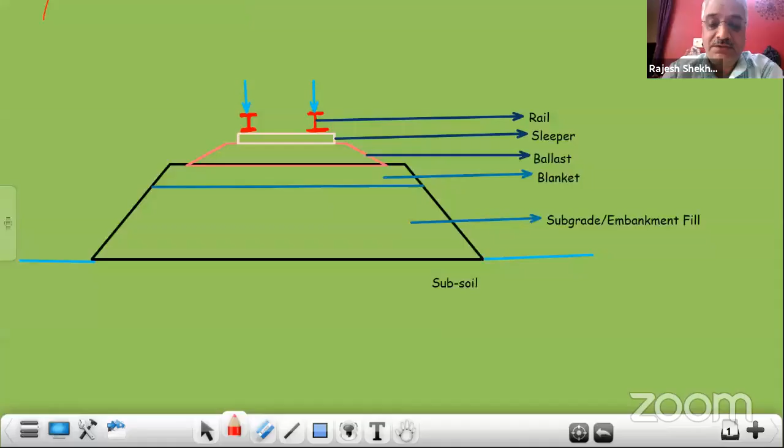Thank you, sir. First of all, I would like to thank Dr. Ramarao and his team for having given me this opportunity to interact with all of you on the subject of design and construction of railway formations. I'll be basically sharing with you the philosophy we follow and the essence of the standards we follow in Indian Railways for design as well as construction aspects of formations.

So, brief about this: Research Design and Standards Organization, what we call RDSO, is headquartered at Lucknow, and I was privileged to work there as Director Geotechnical Engineering. It is the key technical organization for Indian Railways research and standardization related matters. They publish various standards, codes, guidelines, and manuals, including our current standards and specifications for design as well as construction of the formation.

I can tell you they are at par with the standards followed in advanced railway systems. Regarding state of the art, we are at par with whatever railway system of the world we can talk about. And the current specification, which is being used generally for most places, caters to heavy haul.

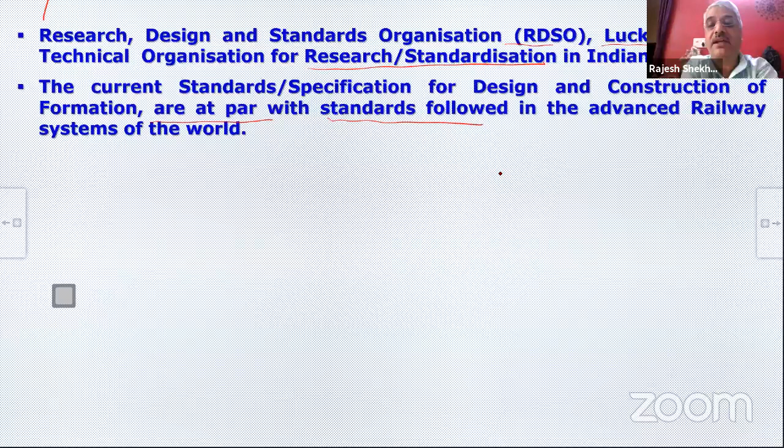Normally in railways, the haulage is spoken in terms of axle loads. So we have specifications up to 32.5 ton axle load. Most commonly used now are 25 ton and 32.5 ton axle loads. For normal railway works, all embankments are being constructed for 25 ton axle load.

And you must be hearing there are dedicated freight corridors. Two dedicated freight corridors are under construction: between Bombay to Delhi near Dadri, and on east to west from Dankuni near Calcutta to Ludhiana on this side. There, the axle load being followed is 32.5 ton.

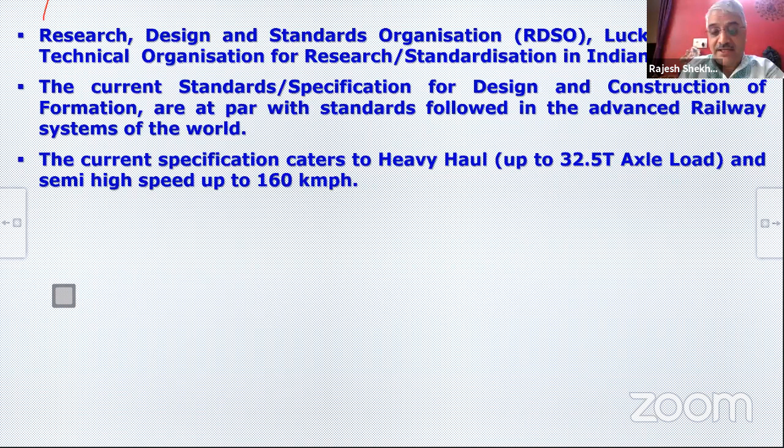Presently we cater up to 160 kmph speed because our passenger trains' maximum speed is 160. There was a proposal, and in fact the progress work is in progress, for what we call the bullet train or high speed between Ahmedabad and Mumbai, where the design speed is 320 kmph. For this also the specifications were under finalization.

But later on, government as a policy matter decided that this track will not be on conventional formation because of various issues related with acquisition of land and maintaining track without fencing and all those things. So now it is being constructed on viaducts, and therefore these specifications were not finalized. But whenever it is needed, they will get finalized.

Now to tell you about current standards, just a basic idea about how they were finalized and what they were based on: they are mostly based on standards and practices of UIC. UIC is a French name, its English translation is International Union of Railways. This is the world body of railways research and standardization, so our specifications are primarily based on the concept followed in UIC.

There are two or three concepts world over which are followed for embankment design. Most popular is UIC, which most European railways and most heavy haul and high-speed railways follow world over. There is another concept known as AREMA, American Railway Engineering and Maintenance-of-Way Association, which is a bit different from this. We basically follow the UIC concept.

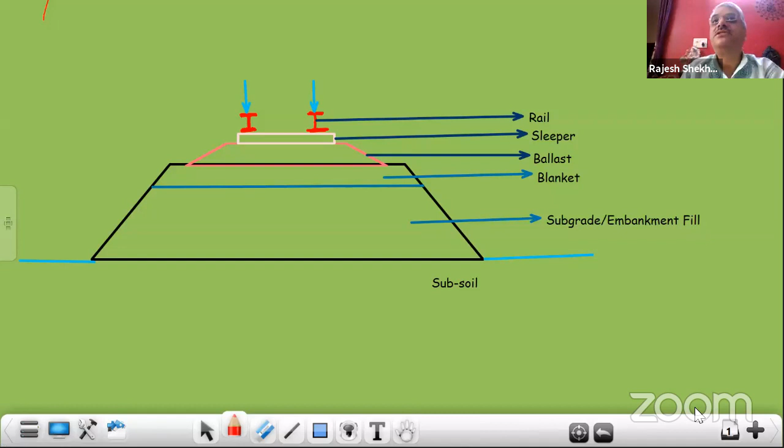For doing this, basically what is done in the UIC concept is something like this - I will just like to sketch it. If we see the cross section of railway formation, the load through axles or wheels comes to the rails. From rail it goes to sleeper. From sleeper, below it, there is ballast, so it gets distributed to ballast.

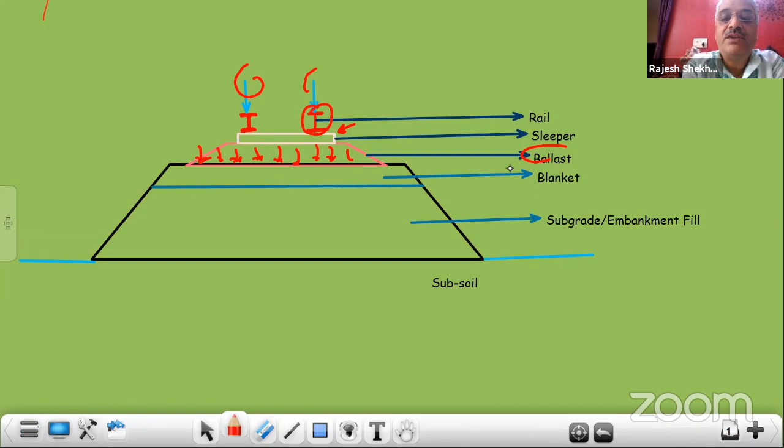And from ballast, as a uniformly distributed load, this goes to the top portion of the formation known as blanket - we'll see this in detail. From blanket it goes further to further layers. So normally the approach generally followed is that pressure intensity here should be less than or equal to 3 kg per centimeter square, and here it should be less than or equal to 1 kg per centimeter square.

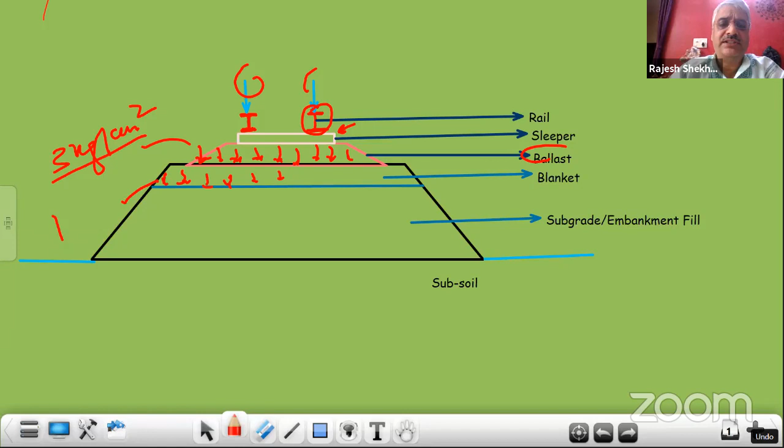This is talking about repetitive dynamic load. This is the general concept which UIC follows - this is the basic concept. That's why I said we are following the concept of UIC.

Then for achieving this in the Indian Railway standard, because we cannot ask users to do this analysis - every user at field cannot do finite element analysis or modeling - some ready-made parameters, based on this analysis, have been specified for direct implementation in the field, as we will go along. For doing this, FEM modeling and studies were done, wherein IIT Kanpur and IIT Delhi were involved.

All the components of track and embankment were modeled, and some field studies were also done. In addition, we have also gelled in more than 150 years of experience of Indian Railways in construction, maintenance, and strengthening of formations. Based on these three things, our specifications have been finalized, and in fact it is a continuous process.

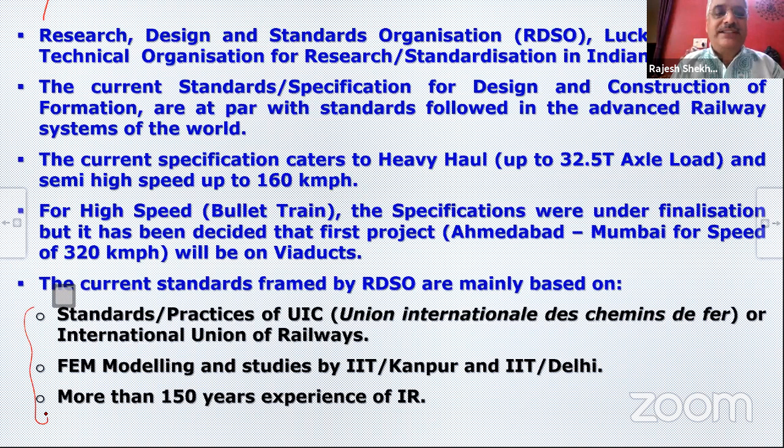Even last year and this year, we have issued some corrections, some additions, and RDSO keeps on doing it. There are people in the field also involved - there are committees. In fact, I am also a member of the committee which looks after revision of codes, which did the recent revisions. So this is in a nutshell how we finalize our specifications.

Now we will go further.

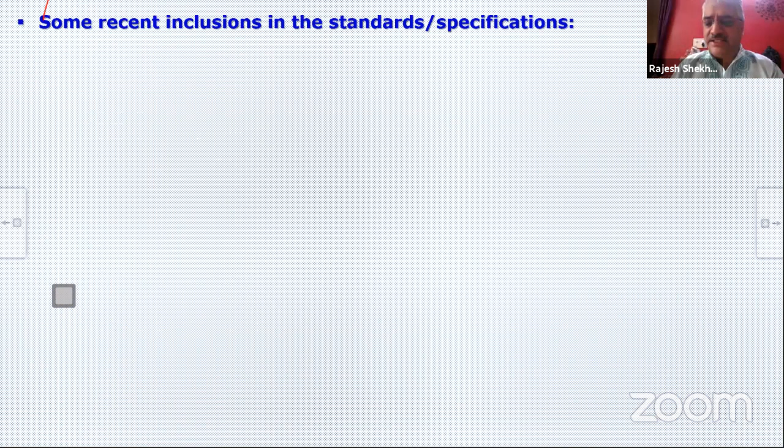Some recent inclusions in the standard or specification, or some concepts which we have introduced recently - I can say in the last 2-3 years. I will just briefly tell you before going into detail.

World over, for design of flexible pavement, railway embankment is also nothing but a flexible pavement. The concept of EV2 is the state-of-art parameter. EV2 is a deformation or strain modulus of the embankment. V means it is variable load. So under cyclic plate load test, when you measure the strain modulus, and 2 is for the second cycle - that is the strain modulus which you measure is EV2. We have introduced EV2 as an acceptance parameter for the finished layer in earthwork. We will see later what are the values and all. This is a very, very recent addition - last year, July only we did it.

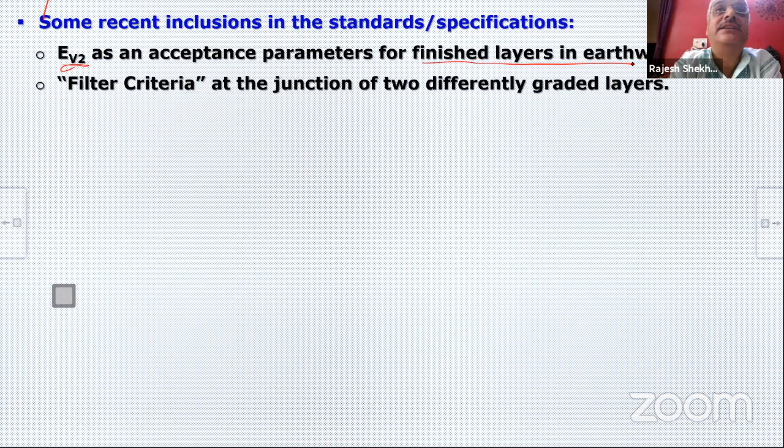We'll see this. Even in India, in highways and airport authority, people have been using nuclear gauges for checking quality of compaction, but there was no Indian code or method. Now, in fact, we have published our railway test procedure for using nuclear gauges for checking quality of compaction. It is mostly based on ASTM and British code, but based on our Indian conditions, we have tempered a few things, and this also has been issued.

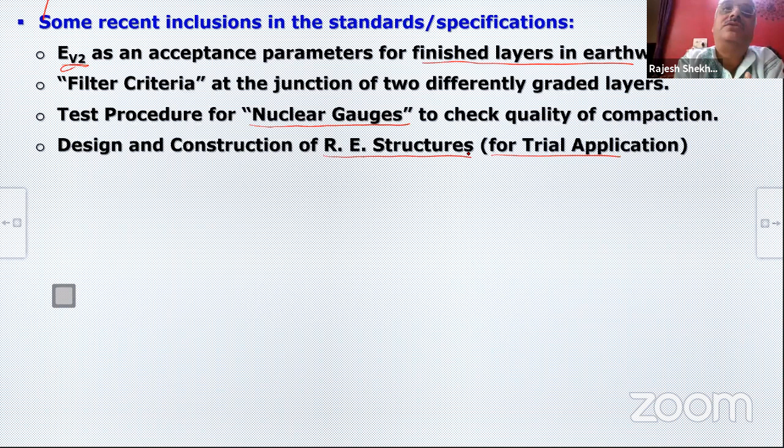Then we have also issued, for trial application, design and guidelines for design and construction of RE structures for railway embankment. We have been doing a lot of reinforced structures for highways like ROBs, which even railway does. For our railway structures, there was no guideline. So 3-4 years back, we issued it. Of course, it is for trial application and it is under revision now.

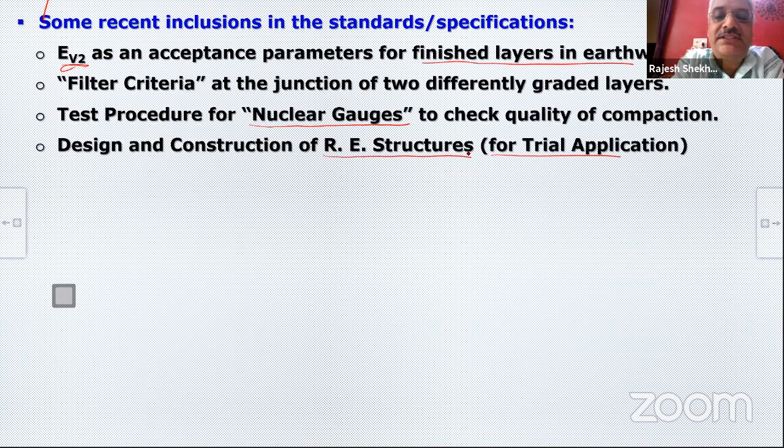We have a lot of jute geotextile products, especially in the eastern part - National Jute Board and an agency, IJIRA, Indian Jute Industries Research Association, doing a lot of work. In consultation with them, we have published our own railway standard for using jute geotextile in railway embankments wherever possible.

So this is just a brief background, and use of slope compactors. In fact, in our new specification which we are issuing, we are specifically making it mandatory to use slope compactors in addition to normal compaction of the embankment, because I have seen embankments in other countries - in advanced countries, in this country, everything is at state of art. The only problem where we were a little bit lacking was erosion control on the slope.

Many times the term sub-ballast is also used for blanket. But technically speaking, both are not the same, because sub-ballast is always part of ballast and extends only up to here. If it is sub-ballast, its cross section will be like this, and from here my embankment will start. Whereas blanket is part of formation, and therefore it extends to the full width of formation. So technically, blanket and sub-ballast are not the same, but as I told you, many places they are used interchangeably.

So this is blanket. Below blanket, the man-made filled-up layer is known as subgrade. We will be using this term, and many times we also call it embankment fill, subgrade or embankment fill. And many times subgrade is also divided into two layers, upper part of subgrade and lower part of subgrade.

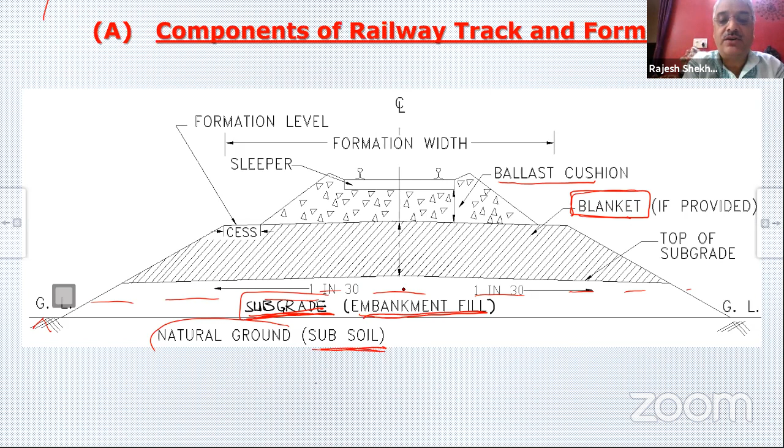We'll see it. And the existing ground, this is existing ground level. The natural ground below that is called subsoil. So the terminologies which we will be using very frequently in coming slides are blanket, subgrade or embankment fill, and subsoil.

Okay, so now what are the design and construction aspects in embankment? With the same sketch which I have just explained to you, I will show on that. First part is top width of the formation. What is shown here, from here to here, this is top width of the formation.

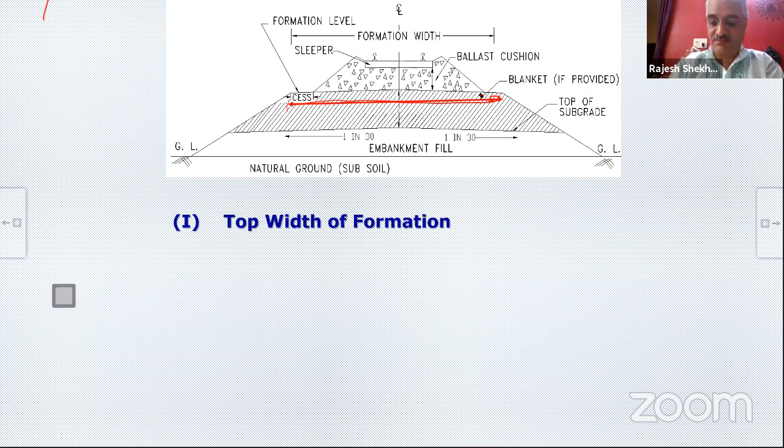First design parameter. Second is height of bank or embankment above ground level. So we are talking about this. This is ground level, this is top of bank. So this is height of embankment above ground level.

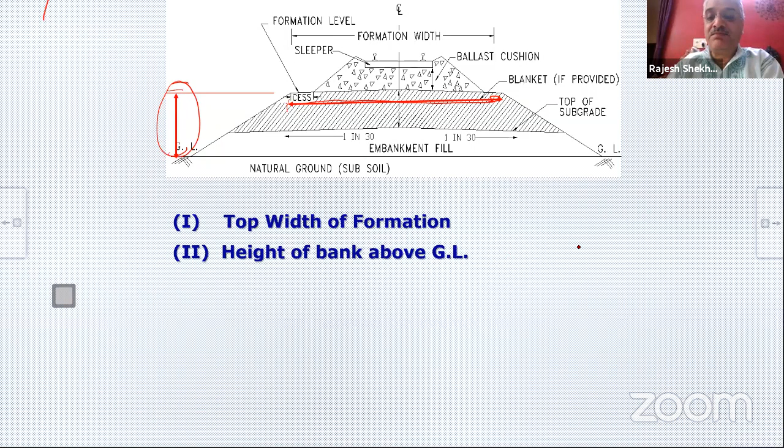Then next is side slope of embankment. So this is side slope of embankment. We are talking about this one. And it is, rather than in degrees, normally the practice is to express in terms of 1 vertical to how many horizontal - 1 vertical to 2 horizontal, 1 vertical to 3 horizontal, 4 horizontal. So 1 vertical to n horizontal, that is how we express it.

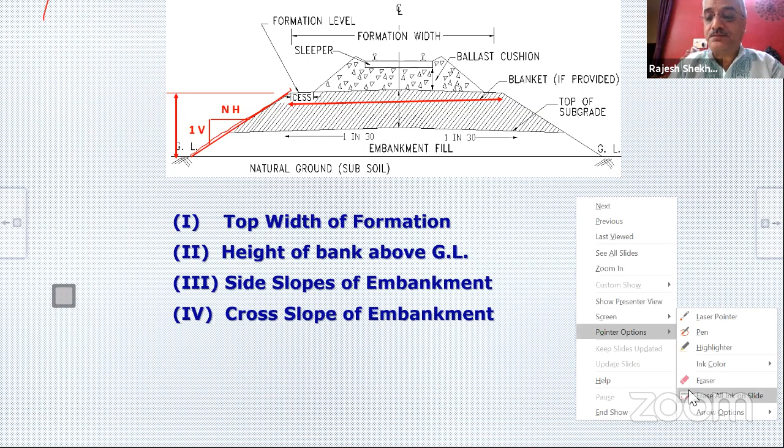Then the next design aspect is cross slope of the embankment. The top of the embankment is not flat. It falls from the middle, on both sides. So this slope is known as cross slope. When we are talking about cross slope, we are talking about this slope of the embankment, and this is also expressed as one vertical to how many horizontal.

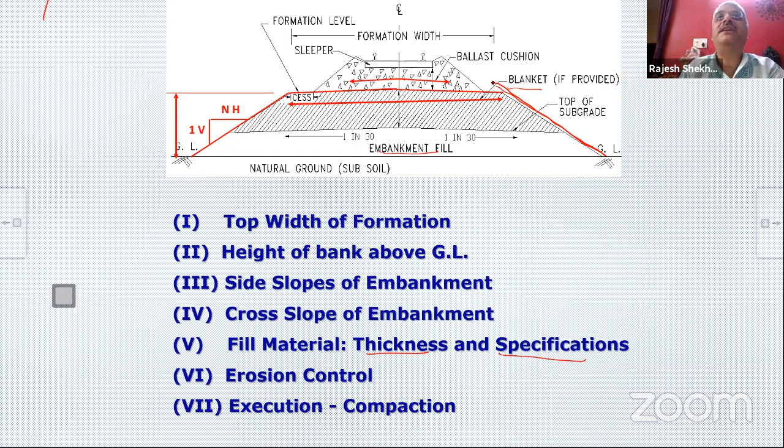Next part is fill material. There are two types of fill material, blanket and embankment fill or subgrade. So what are their thicknesses and what should be their specification? That is the next aspect. Then what sort of erosion control measures - and erosion control, when we are talking, it is about erosion control on slopes. And last is actual execution of work, laying the earth in layers, compaction, thicknesses. So these are 7 aspects of design as well as construction of the embankment.

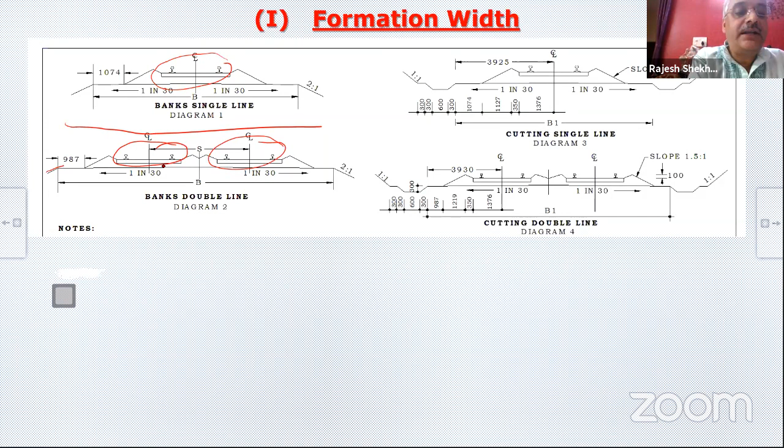This is one thing where it is embankment and it is single line. You can see there is only one track and it is in embankment. Second can be there are two lines, in embankment. So this is double line in embankment.

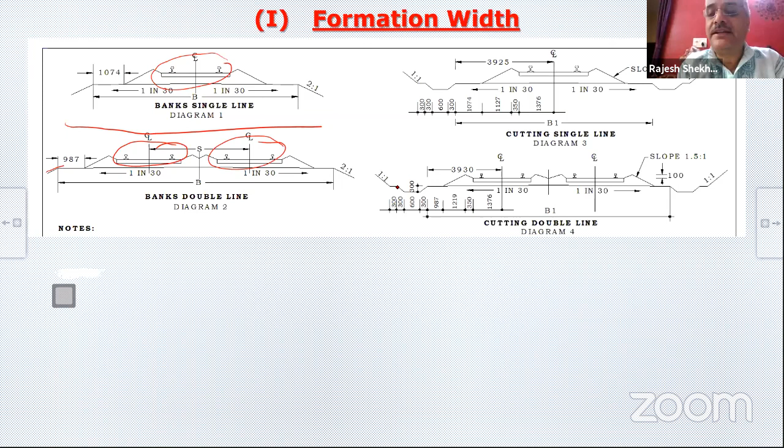Third can be single track, but in cutting. And fourth combination is double track in cutting. So these four are the most common combinations. For other combinations, of course, we can extend the same thing.

So for these combinations, the widths are specified like this. Of course, we are talking about broad gauge. I'm not talking about meter gauge because there are no more new constructions. So previously the width used to be different, but recently we have made them same for embankment as well as cutting. That is from the year 2015.

For single line in embankment or cutting, the width required is 7.85 meters. This is taking into consideration the width of sleeper from its strength point of view, required ballast cushion, ballast side slope, then some space on the side, what we call a cess, for maintenance to walk and work and all. With all those considerations, for single line this width is 7.85 meters, and for double line it is 13.16 meters.

And it is same now in embankment as well as in cutting. In embankment, of course, we measure it from this end of embankment to this end of embankment, whereas in the cutting we measure up to here only. And after this, there are some side drains in cuttings and berms and all, etc. So that's the only difference in measurement. Otherwise, as far as the width of formation is concerned, it is the same.

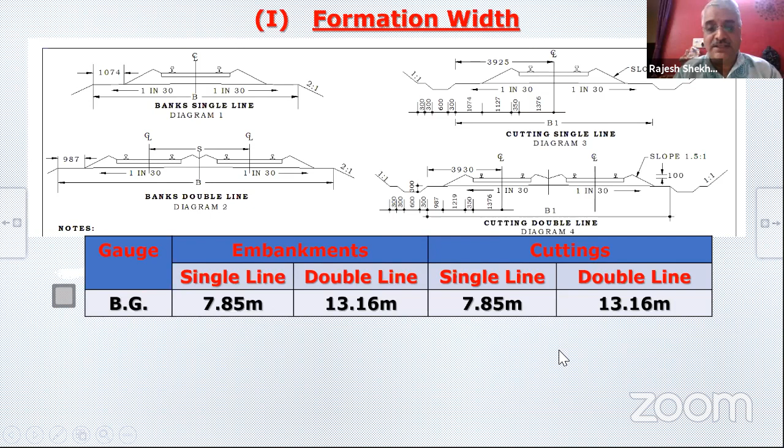First part done. Second part was height of embankment, and the stipulation is the height of embankment should not be less than 1 meter above ground level or HFL, whichever is higher. The reason for giving this is it gives proper drainage, because if embankment is just at the ground level, any water stagnant in the ground will have tendency to come and stagnate on track and create problems.

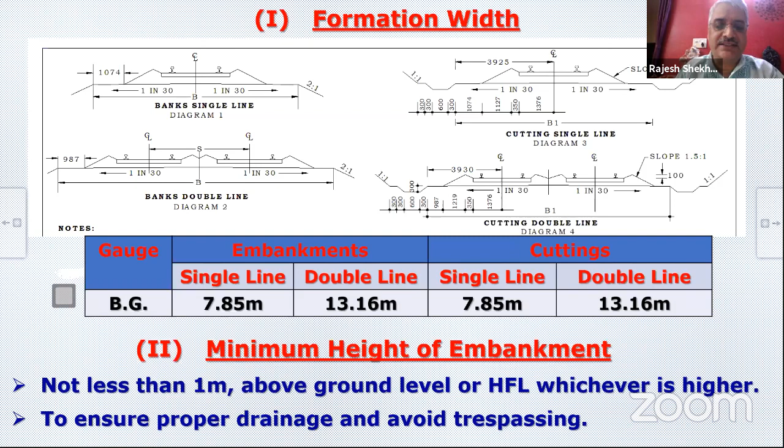So just to have drainage, that is the first thing. And the second thing, it discourages trespassing. It may not prevent trespassing, but in heavily city or town areas, people normally, if bank height is there, are discouraged from trespassing it. So that's the second reason. This is the second parameter about minimum height of embankment.

Then coming to side slope of embankment. Now the side slope of embankment is decided based on slope stability analysis. A slope stability analysis is done giving the properties of all the layers, subsoil, including subgrade, subsoil, subgrade, and blanket, their properties, their geotechnical engineering properties, and slope is analyzed.

And the method prescribed is Bishop's simplified method. We use this right now because this method, number one, gives results on the conservative side, and it can be easily done even manually, not so easy, but still as compared to other methods. And in Bishop's method also, for taking into account the pore water pressure effect, the use of coefficient RU, the pore pressure coefficient, has been defined.

RU, as we know, is pore pressure divided by weight of soil at that place, U by gamma H. This is the RU value. So this method is prescribed. And for existing bank, if you are analyzing stability, we can measure pore water pressure using any instrument and calculate RU. For new bank, actual measurement is not possible.

So there are two solutions. Number one, we do the modeling, hydraulic modeling, like many software now. SlopeW has got interface with SeepW. From SeepW, you get this value RU. Or, design RU values are prescribed, and we can use directly those design values from our codes.

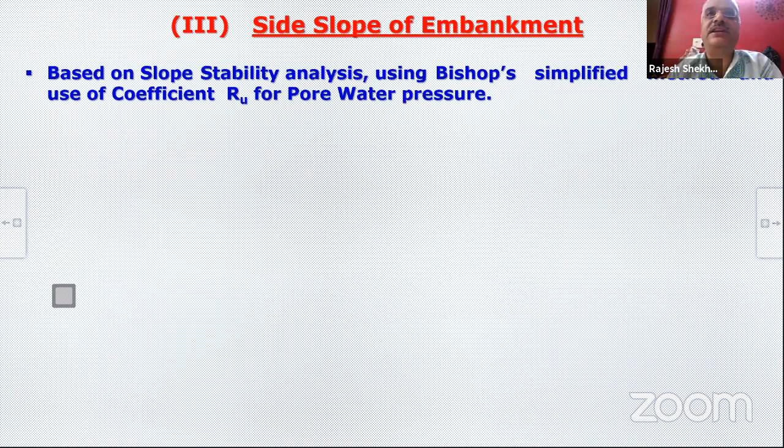And our code says that normally or usually up to a height of 6 meters, slope stability analysis is not required. You just follow the standard slope.

Oh, again, there is a, am I audible? Because again there was a power fluctuation. I think power has come back now. Hello?

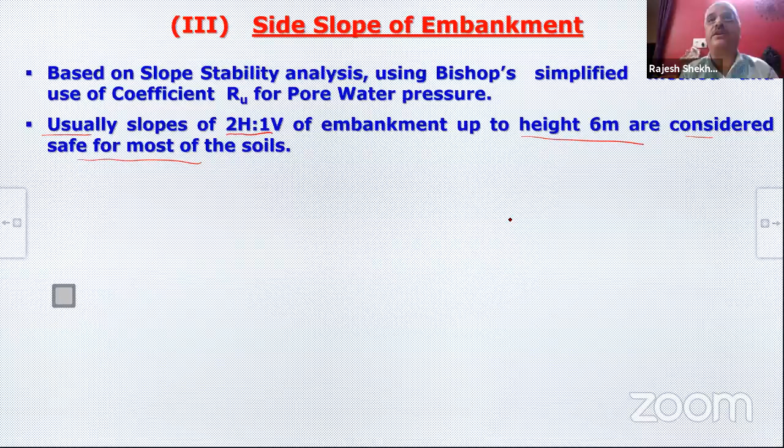In some cases, we may have to do slope stability analysis for less than 6 meters also. Those cases are where it is soft, compressible, or marshy type of subsoil, like coastal areas and river delta areas, what we call marine clay or soft soil. In those areas, because even smaller banks, we have experience in coastal areas. I have worked for a long time there. Even banks of 3 meter and 4 meter heights have failed, so even with slopes flatter than 2 horizontal to 1 vertical.

So there we must do slope stability analysis for any height of bank. And second thing is, even if the subsoil is weak, and even if subgrade is fill material having a low value of C dash, where low value is defined by C dash by gamma H in the range of 0.01 — C dash being effective cohesion value, gamma its in situ density, and H the height of embankment — in these two cases, we do slope stability analysis for smaller height slopes also.

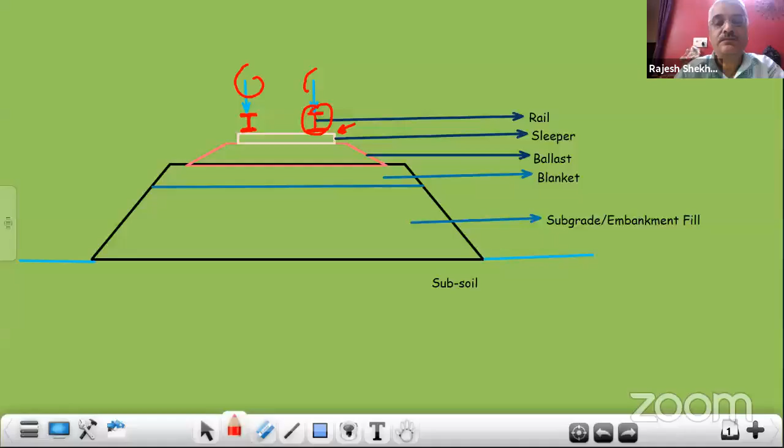And in our slope stability analysis, we don't take live load into consideration. The reason is that this live load effect dies down within the top 1 to 1.5 meter of formation. In fact, we have checked this by modeling and physically by putting pressure cells and all. The live load effect does not go below the top 1 to 1.5 meter of the formation. And if you want to take live load into consideration, the analysis becomes complicated and difficult, so we don't.

That is the reason. But this becomes an issue in case of smaller height embankments, because if my embankment height is less — say 3 meters — then 1.5 meters of that height is influenced by live load, and that becomes significant. So how we take that into account, I will show next.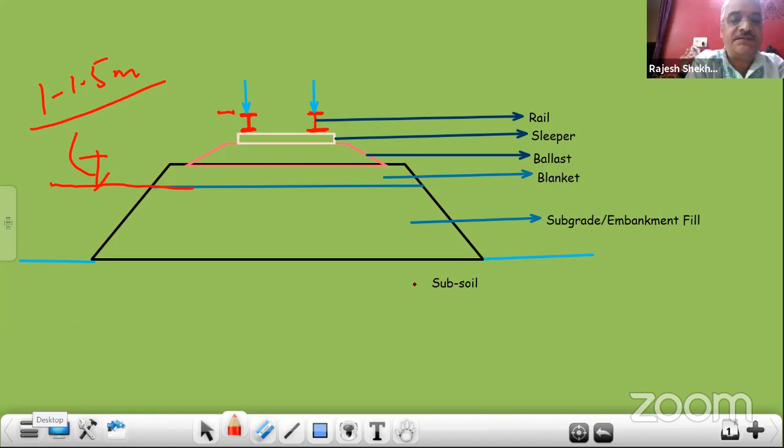The minimum stipulated values of factor of safety after doing slope stability analysis by the Bishop simplified method are: for short-term, end of construction use, before putting anything else there, we can go up to 1.2. Otherwise, preferably for long-term stability it is 1.4. And for smaller height embankments, as I was telling you, the effect of live load is indirectly accounted for by prescribing a higher factor of safety of 1.6.

So for embankments of height up to 4 meters, the prescribed factor of safety has been kept as 1.6, because we are not taking into account the live load effect, and for these embankments live load cannot be neglected.

That's the logic. After doing all this analysis, either you provide the slope as per analysis found to be safe, or at minimum it should be 2 horizontal to 1 vertical. In normal cases, other than reinforced slopes, normal slopes should not be steeper than 2 horizontal to 1 vertical. The reason, number one, is that our Indian railway system is still semi-mechanized.

There are human beings who work and climb on the embankment with weight on their shoulders, so climbing on a steeper slope becomes difficult. Second, in case of rain, the velocity of rainwater becomes high and causes more erosion to the bank. Based on these two considerations, this limit is set, but there are steeper slopes possible, where we have to take special measures, or make reinforced slopes or protected slopes.

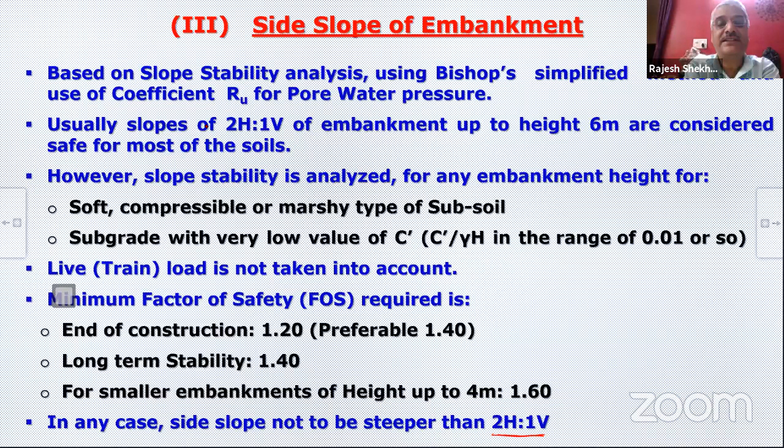Then coming to the fourth part, that is cross slope. In case of single line, it starts from the center of the track — this is for a new single line when we are constructing — and it falls on both sides. In case of double line, it starts from the center of the bank and then falls on both sides, with a value of 1 in 30.

This is the design value of cross slope, and it is given for drainage, because you don't want your formation to remain in contact with water for a long time. Drainage is the best maintenance practice in railway embankments, or for that matter any embankment. So we want to drain the water away from the formation as early as possible, and this is the first line of defense against that. 1 in 30 is the cross slope, and plus minus 2 is the tolerance provided, so after execution, when we measure, it should come within the value 1 in 28 to 1 in 32.

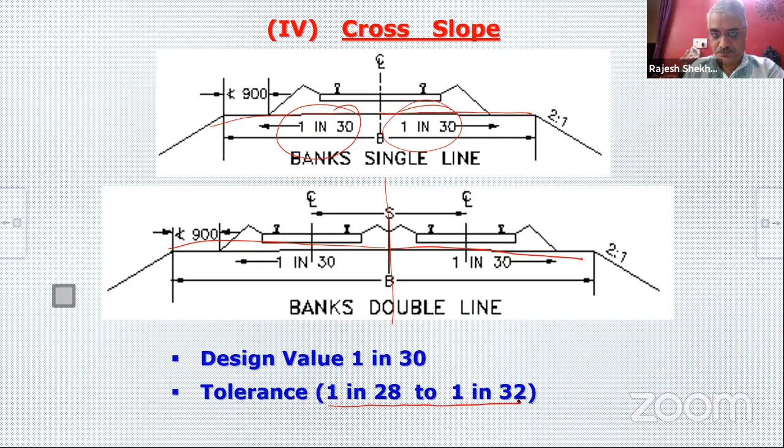Now we come to the fifth part, that is fill material. What should be their thicknesses and what are their specifications?

First of all, our attempt, and that for that matter anywhere world over, any geotechnical engineer always tries to use locally available earth to the extent possible, because otherwise it increases cost of material, which increases cost of project, the timelines for project, and it causes a lot of environmental pollution in terms of diesel burnt for running all those dumpers and vehicles.

So generally we say any type of material can be used except unsuitable material. World over, even UIC and others, that is the practice, only the unsuitable material list is defined. Other than that, everything else is suitable. So unsuitable materials are, first, any type of organic material.

Organic material, it can be organic clay or organic silt, is not allowed to be used. Peat, another organic material, is not allowed. Chalks and dispersive soils are not allowed to be used in formation. Then poorly graded gravel and sand, where poor gradation is defined, number one, with CU value, coefficient of uniformity, less than 2.

And then we have specified some limiting gradation curves, like these charts. This is the gradation chart, with grain size in log scale and percentage finer, and these are between these two boundaries. These are boundaries for most liquefiable soil. So these soils should not be used.

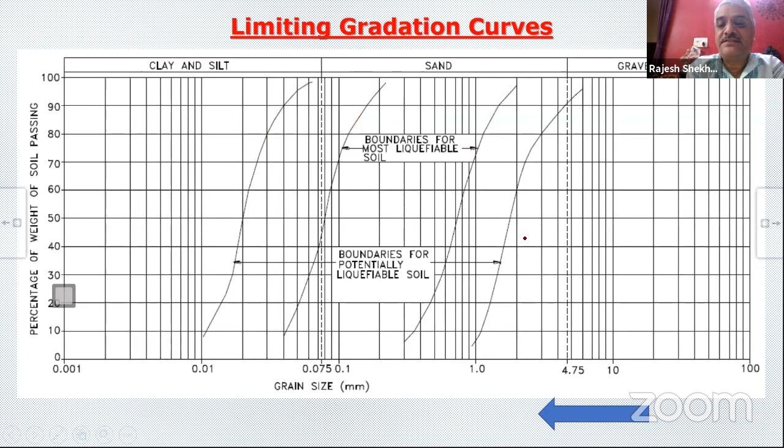Then CH and MH type soil classifications, which is clay and silt of high plasticity, should not be used in the top 3 meters. Because as I told you, in the top layer stresses are more, and the live load effect is also there. And second, the effect of water, the seasonal variation of water, is also in the top layers only.

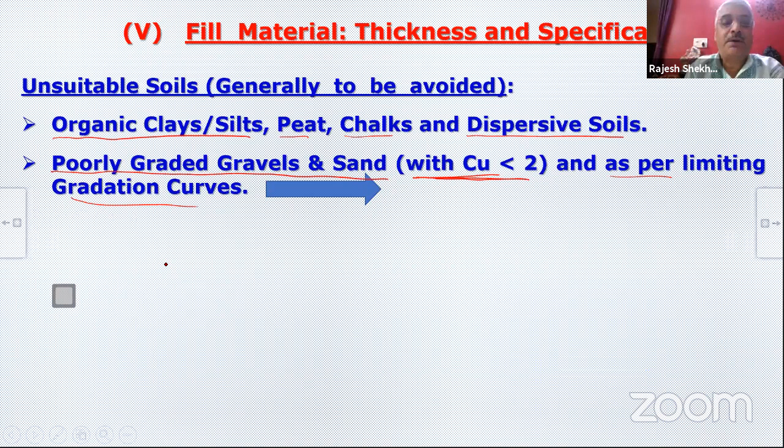Problem with this type of soil is, even Indian Railway, where embankments have been constructed with such soils on top, we are having a lot of problems. As on date, there is around 5,000-6,000 kilometers length which we are trying to rehabilitate.

There, if you put this, when water comes in contact with them, they are expansive type of material. They will expand and disturb the track. They will weaken and bearing capacity will reduce. And during dry season, again, it will shrink and cause track disturbance. Cracks will be formed in the embankment. It becomes unstable formation. That's the reason.

And even then, if it becomes inevitable, or it is an economical consideration based on some places, maybe for 100 kilometers length or something, you don't have suitable material, then what will you do? That's why the term used is 'generally avoided'.

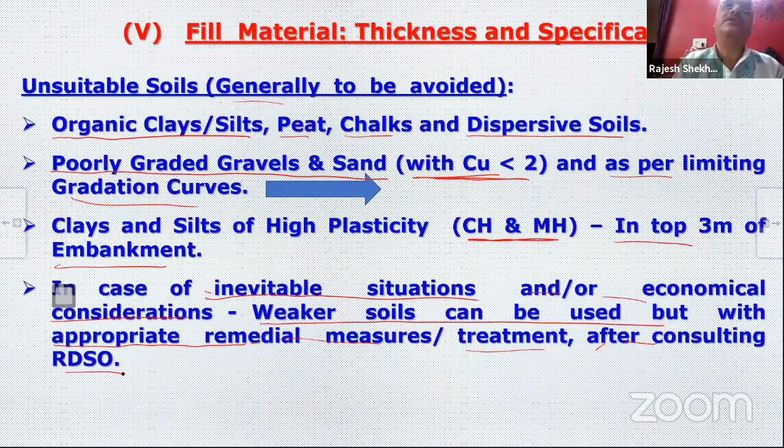In that case, we can use weaker soil, of course, but then case by case remedial measures or treatment has to be decided in consultation with RDSO or maybe some good consultant, where it becomes unavoidable to use such type of material. This was about, in general, the type of fill material.

And then there are some 2-3 terms which you will be using, so I will briefly explain them before telling the specification further. We use a term which is used world over, known as single layer and 2-layer system of construction, or single layer and double layer system of construction. What exactly is it?

In single layer, the blanket layer, top layer, is actually the most costliest material. If we see this from a basic economic point of view, as we go down and down, the most costliest material is ballast, next is blanket, next is my subgrade, and of course subsoil is just available there freely. So I try to minimize the thickness of blanket to the extent possible from an economy in construction point of view.

So in single layer system, that is our conventional system, there will be a blanket layer, and below the blanket layer we will have the subgrade layer, as in the sketch I showed you. But in the 2-layer system, the blanket layer is divided into 2 parts. The top portion is known as the blanket layer, and the second part below that is known as the prepared subgrade layer, and then below that our normal subgrade starts.

Prepared subgrade is a material which is inferior to blanket, but is better than subgrade. And why it is so, I will briefly explain to you.

Let us say in this case, blanket layer thickness sometimes goes up to 60-70 centimeters. If we take the stresses here, on top of blanket, let us say P1 is the stress. There is a substantial reduction in stresses through the blanket. So when we go with blanket, at the bottom of blanket, this stress may be P2. Now P2 is quite substantially less than P1.

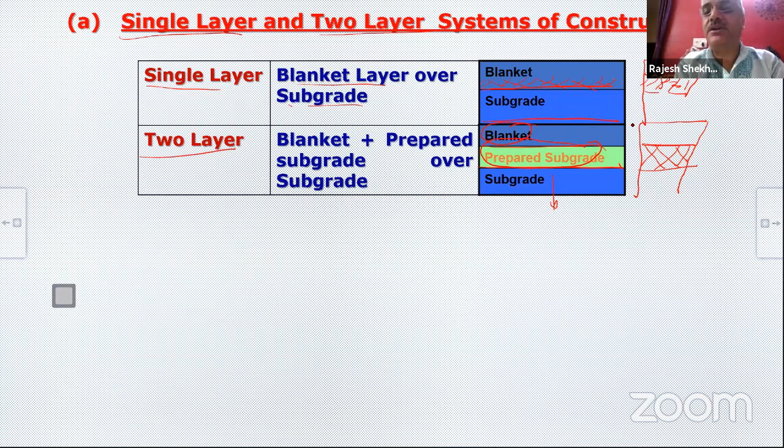Most places this system is economical, except few places where blanket material is available at very lesser cost. There are few parts in India where either due to lot of stone quarries, or local material is so good that blanket cost is less. But those parts are hardly there - we did a survey pan India from RDSO, and found only 5 to 10% of the country is where blanket will be cheaper. So therefore mostly this is followed, but at some places this other concept may also be followed. It has to be decided on which concept will be cost economical.

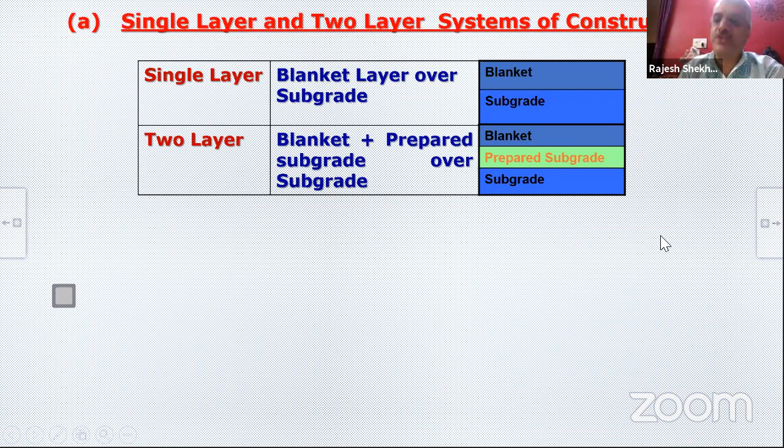Then there is another terminology which basically came from UIC and which we are also using. This is different than engineering classification. We call it soil quality classification. Since soil quality is the consideration, we call it SQ classification. And all our soils or fill materials are divided into 3 categories: SQ1, SQ2, and SQ3.

And this bifurcation is basically based on fines content, fines passing 75 micron sieve. So if my fines content is more than 50%, then we call it SQ1 soil, most fine graded soil. And generally these engineering classifications will fall in this category. But this is governing - if there is a contradiction between this and engineering classification, that is only recommendatory, this is governing. So mostly engineering soil classifications will fall in SQ1 category.

Second type of soil, which is better than SQ1, is known as SQ2. Their fines content is 12 to 50%, and these soils will fall in this category. And best type of soil is SQ3, most coarse grained, cohesive or non-cohesive soil. Their fines content is less than 12%. So this is another terminology.

Why I am using single layer, double layer is we'll be using this term when we go to further slides. And SQ1, SQ2, SQ3 - SQ3 is best, SQ2 is in middle, SQ1 is most fine grained and least strength soil.

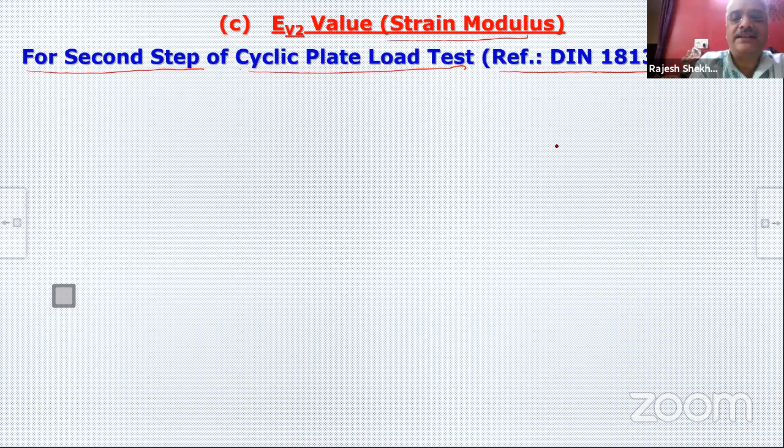Then, filter criteria - I have told you we have introduced the filter criteria, and here we use filter criteria between the blanket layer and the layer just below it. Because blanket is a costly material, and our experience has been there are many cases where the material below blanket, over a period of maybe 5-10 years, starts migrating upwards, and this blanket keeps on puncturing into the material below, and after some time the blanket gets fouled by the fine grained material below it, and the whole function of blanket is hindered.

And therefore this filter criteria is given. It is a standard thing world over, wherever two dissimilar things join, even in dams and all, this is used very frequently.

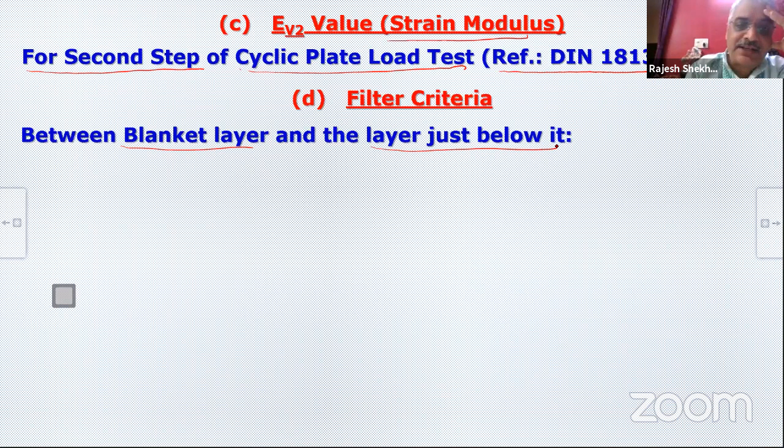The filter criteria which we follow consists of 3 parts. First, the D15 size from the gradation curve of the blanket should be less than 5 times D85 of the layer below it. In a 2-layer or double layer system, this layer below would be the prepared subgrade.

Otherwise, in a single layer system, it will be the subgrade. The second criteria is D15 of blanket should be 4 to 5 times more than D15 of the layer below it. The third criteria is the D50 of blanket layer material should be less than 25 times D50 of the layer below it. All 3 should be satisfied simultaneously.

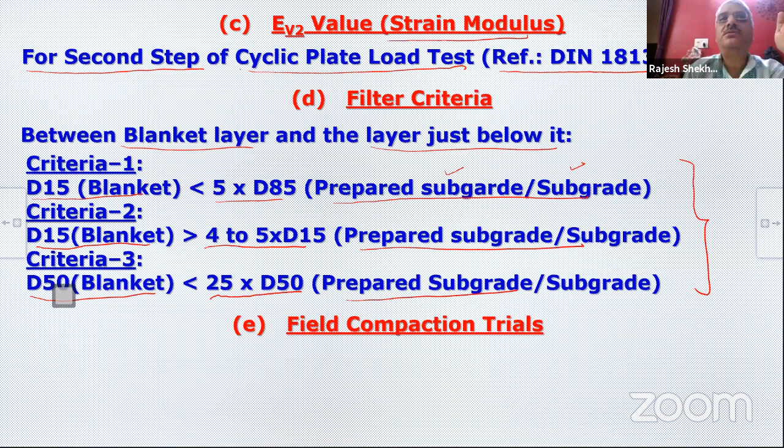Then filter criteria will be satisfied, and chances of the upper layer getting vitiated by the lower layer of lower gradation will be avoided. Then there is a concept of field compaction trial. We do a modified Proctor test, as specified in our railway standards. We take the type of soil we are going to use, and do a lab test, the modified Proctor test, wherein we measure the maximum dry density and optimum moisture content.

But there is a lot of difference, because lab and field conditions are not exactly the same. The compaction effort makes a difference in the MDD which you are going to achieve in the field, and this is not accounted for or taken cognizance of in the lab test. Therefore, there is a stage called field compaction trial.

First, we do the lab test. Then, using that lab test data, we go to the field and do a field compaction trial, wherein we use the same type of roller, its tonnage, that is the compaction effort, and the same soil which we have tested in the lab and which we are going to use at the site.

Additional things which come here, which are not accounted for in the lab test, is how much layer thickness I am going to use in the field. Normally we use around 250 to 350 or 400 mm layer thickness. Even then, if I use 250 versus 400, my density achieved will be different. So there is a combination, there is a procedure to decide what soil thickness layer I will use.

Moisture content also can vary a little bit from OMC, plus minus 2-3% either side. Using these parameters, I do actual trials in the field, and confirm that whatever values I got in the lab, I will be able to achieve them in the field with these parameters. That is done in the field compaction trial before starting the work.

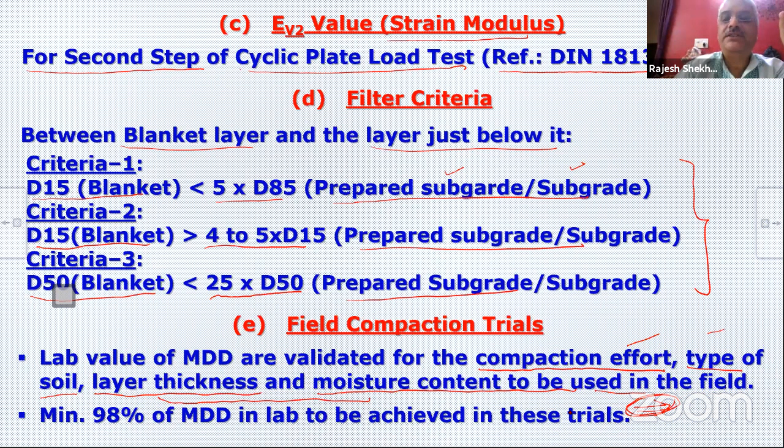The stipulation is that in the field compaction trial, we should achieve a minimum of 98% of the MDD achieved in the lab. Then this becomes my benchmark for further works in the field - the value achieved in field compaction trial, not the lab value. So it is a validation and confirmation of the lab result through a trial before actual full-scale implementation in the field.

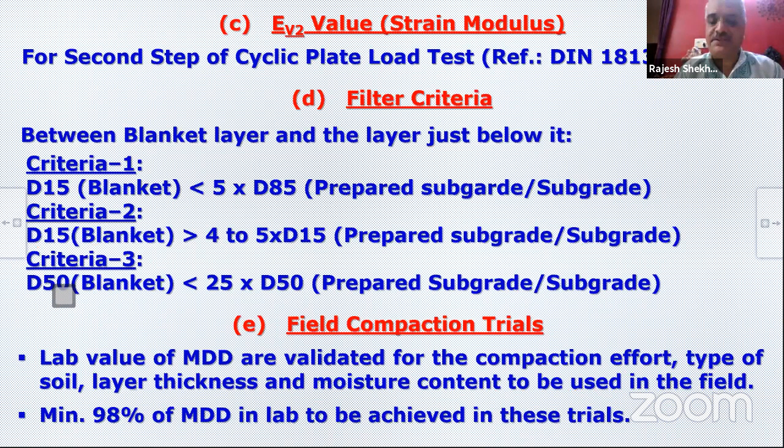Now, with these 2-3 concepts, we will go to the specification for blanket layer. This is the specification of the blanket layer: CU must be more than 7 and CC must be within 1 and 3, because the requirement is that it has to be well graded.

It must have some fines, between 3 to 10%. Why fines are required is, if fines are not there, making a homogeneous mix at site is difficult. It is like kneading flour in our houses for making chapati or puri. If there are no fines and it is very porous, you don't get a good kneaded mix. So that's why you require fines.

And if there are no fines, another problem is there will be erosion during rain, as a very coarse grained blanket material needs some fines for binding. That's why minimum 3% and maximum 10%, because more fines means the soil will become plastic and plastic deformation will occur, which is not desirable.

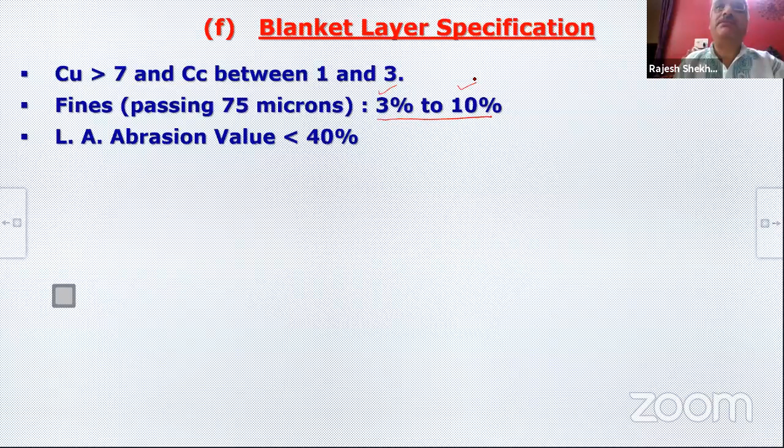Getting naturally occurring material for blanket is very difficult. As I told you, we did a study pan India and found only 5 to 10% of parts in India where you can get naturally occurring material fit for blanket. In the balance places, you have to do some blending, taking quarry dust or stone dust from crusher and adding different grading either at the crusher or mixing some natural material with the stone dust.

So that manufactured material is not in grain form. Natural material like sand will not get crushed to less than grain size, but manufactured material can get crushed during the service life, and therefore its abrasion value is important. So the Los Angeles abrasion value is also specified, and it should be less than 40%, as per the normal Los Angeles abrasion value test.

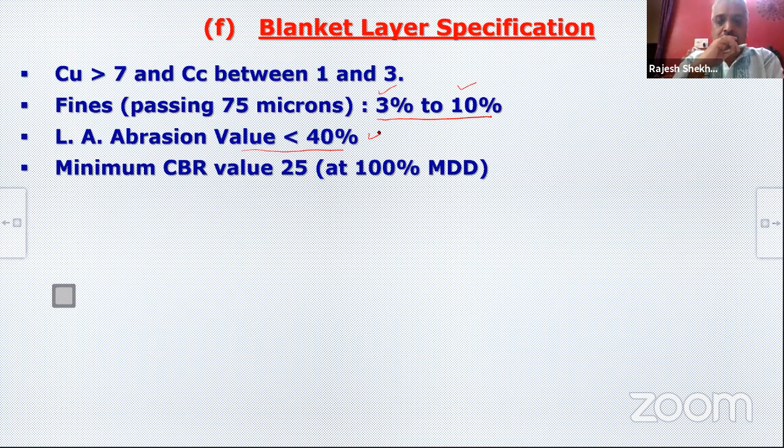Then its minimum CBR value for this material is specified at 25, and CBR should be checked at 100% of MDD. Size and gradation has also been specified.

An envelope is given like this. These are the two boundaries of the envelope, and we must plot the gradation curve for the blanket, and our gradation should fall more or less within this envelope. A little bit outside is okay, but more or less it should fall within this envelope. So this is gradation. Then filter criteria should be satisfied, as we have already seen what filter criteria is.

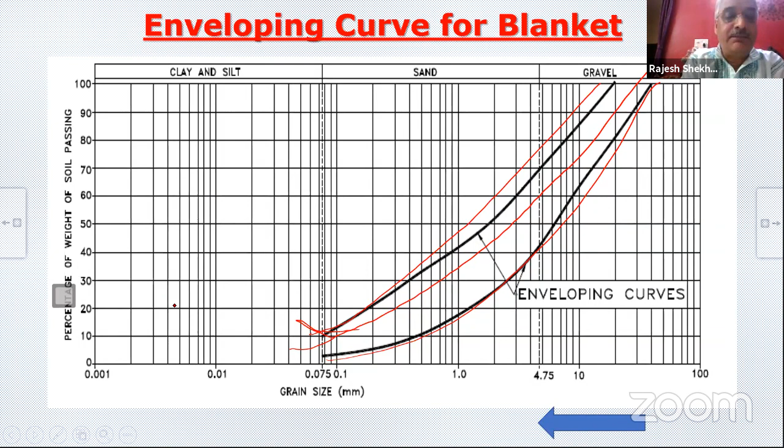And the minimum EV2 on top of the compacted blanket layer is specified as 100 megapascal, wherever the formation is designed for 25 ton axle load, and 120 megapascal for 32.5 ton axle load. And the compaction level which we should achieve should be 100% of MDD achieved in field trial. So this is its specification.

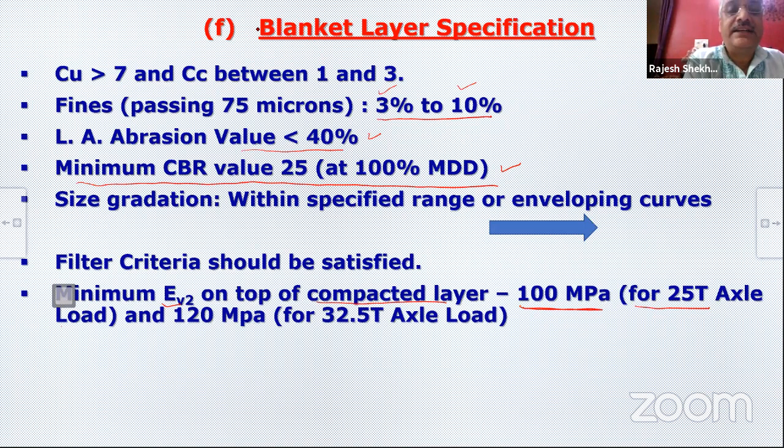This is the table. I will briefly explain the specification of prepared subgrade and subgrade layer. First we will see the single layer system. In single layer system, below the blanket there will be only subgrade. Subgrade we have also divided into two parts, again from an economy point of view, because the lower layer can be weaker while the top layer has to be stronger. So we call it subgrade top layer and subgrade bottom layer. And in the double layer system, there will be prepared subgrade, below that subgrade top layer and subgrade bottom layer.

So there, all this is soil type, what type of soil. Only thing is in the top layer of subgrade, SQ1 is normally not used. It should be used only with dispensation from the principal head of the department, in exceptional cases. Otherwise, for prepared subgrade, SQ1 is not allowed at all. Then these are the required CBR values. This should have more than 6, 3, 8, 5, 3. And if you use SQ1, then it can go up to 4. And here also, if you use SQ1, up to 4.

And at what MDD level this CBR should be checked - field compaction levels for various layers are 98%, 97, 98, 97, 97. As we go down, the general concept is that as we go down in the embankment, compaction level can be a little less, and the soil can also be a little inferior type, because stresses will be less and exposure to seasonal moisture content will be less.

Then minimum EV2 value on top of this - EV2 we check only on the top of the layer. Let us say in subgrade there may be 6 layers, so on every layer we will not use EV2, only on the 6th layer top we will use it. So in subgrade, prepared subgrade, and blanket, only 3 places it will be used. This is the value required if SQ1 is used, otherwise this is the value. This is on top of prepared subgrade, and this is on top of subgrade if SQ1 used, otherwise this other value applies.

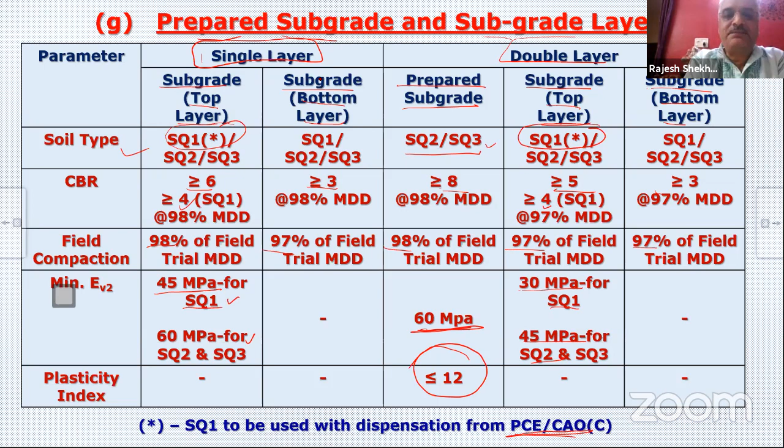Similarly, when we go to the two-layer system, here there will be blanket, then below that there will be prepared subgrade and subgrade layer. So here also there are two charts, 25 ton axle load and 32.5 ton axle load.

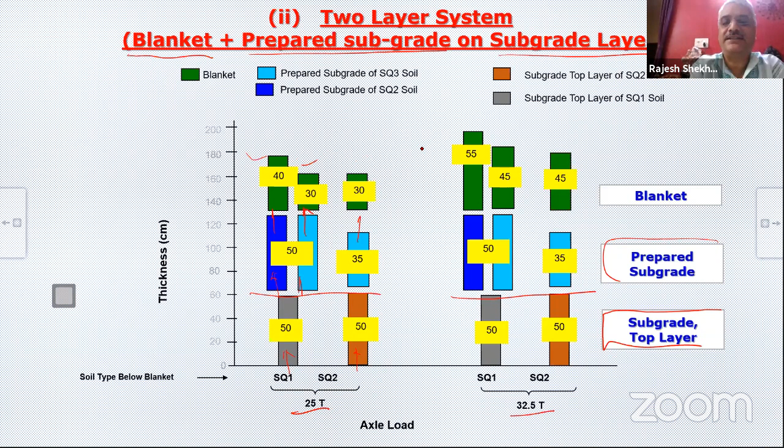Here again we start from subgrade top layer. Subgrade top layer thickness here is half meter, 50 centimeter, whereas there it was 1 meter. Then depending on what layer we have used, SQ1 or SQ2, next is what layers we have for prepared subgrade thickness, and depending on what type of soil we have used, blanket thicknesses are there. So these are charts for various blankets.

This whole combination started from finite element modeling, and from the characteristic strength for SQ1, SQ2, SQ3 type of soil, we calculated how much stress will come - this is a reverse calculation. A field person, as I told you, cannot do FEM analysis and modeling, so for him only thickness and specification have been specified, but the basis is modeling and permissible stresses.

Then there are some other stipulations which I will quickly cover. One is if we use subgrade or prepared subgrade of fine grained material. Fine grained can be SQ1 or SQ2, both are fine grained, because in both cases fines can go up to 50% or more. Again, the doubt is if fine grained material is used below blanket, then your material may foul your blanket.

So in both these cases, this is a double layer system - this is my blanket, this is my prepared subgrade, and this is my subgrade. So here at the junction of prepared subgrade and blanket, I use a separator layer, again to prevent fouling of this blanket. In a single layer system, below blanket is subgrade directly.

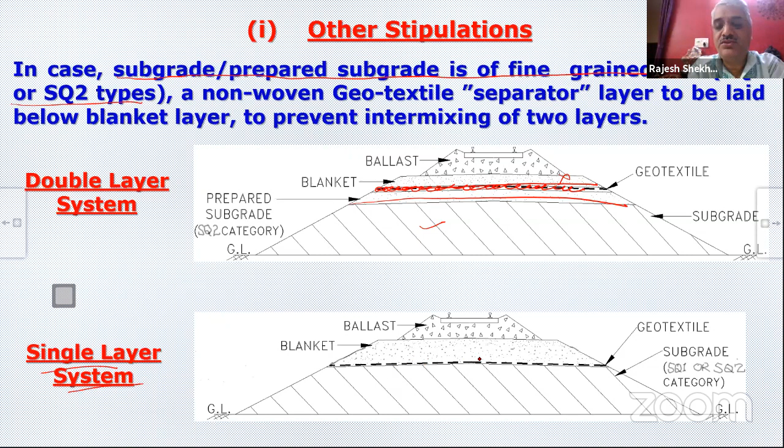So at this junction, I use a separator layer, and this separator layer is a non-woven geotextile separator layer with specification separately given. When we use a separator, then these two materials' filter criteria need not be satisfied because they are not even coming into contact with each other. If I am not using a separator, then I have to satisfy filter criteria.

That is simple logic. Okay, now we have seen our material specification. Now field compaction - about compaction, as I've told you, we do lab test, then do field compaction trial, and then compaction level to be achieved for every level EV2 I have told you, and compaction checks are done on completion of stipulated area of compacted layer.

The plan area of any layer, once that much area - it is normally 500 square meter, and at critical locations it is 250 or 300. Every 500 square meter of plan area, a compaction test is done, and any of these methods can be used: sand replacement, core cutter.

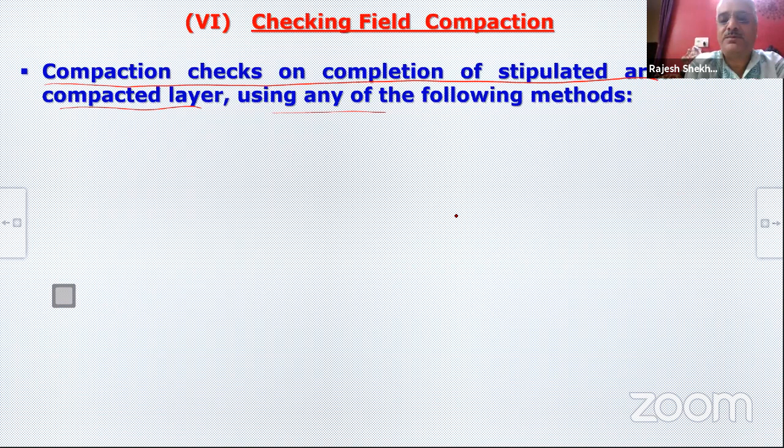As we know, sand replacement can be used for any type of soil, and this is as per IS code. Core cutter can be used only for fine grained soil. In porous material, the core cutter edges get deformed and you cannot take a full sample - it gets crumbled. But this is the code, and this is what I was telling.

This is the use of nuclear moisture density gauges. They are very fast - they do the test in 3-4 minutes. They are very accurate. You can do multiple tests at the same location. Here, once you make one pit, you cannot do another test there - you have to go a little bit to the side, and you can take the results in your computer. It's a very good thing.

So for this also, we have issued a procedure, and it can be used for all types of soil. And EV2 check, in addition to degree of compaction, is done on the finished top of subgrade layer, finished prepared subgrade layer, and blanket layer for every 1 kilometer length of formation. Every 1 kilometer, one EV2 test is done, and we must get the value of 100 or 120 megapascal, as I told you.

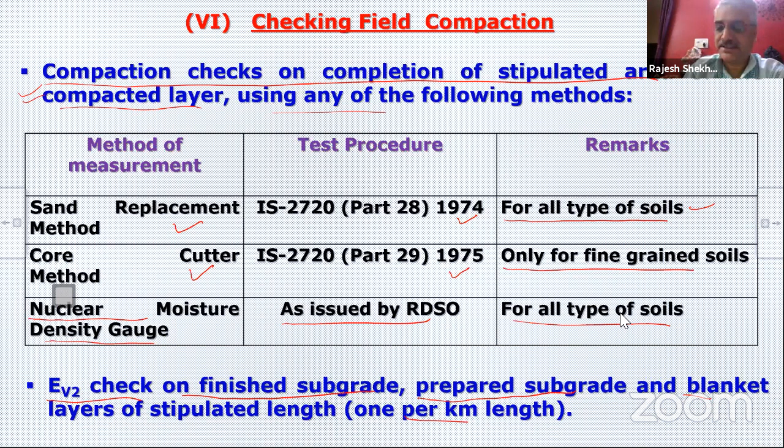Then next is erosion control of slope, the last part of construction. For erosion control, the most economical or preferred method is to grow locally available vegetation in the form of turfing. During rainy season, you grow whatever locally growing grass or doob or whatever material, bring it in the form of sods and put it on the embankment. It grows - in 70-80% of the cases this is successful, making it the most economical and preferred choice.

In some places, either it is very dry or the soil is very infertile, does not have any nutrients, and if there is a problem, then we have to try other methods. But there is a grass known as Vettivar grass. This grass is one such variety which is grown everywhere across India.

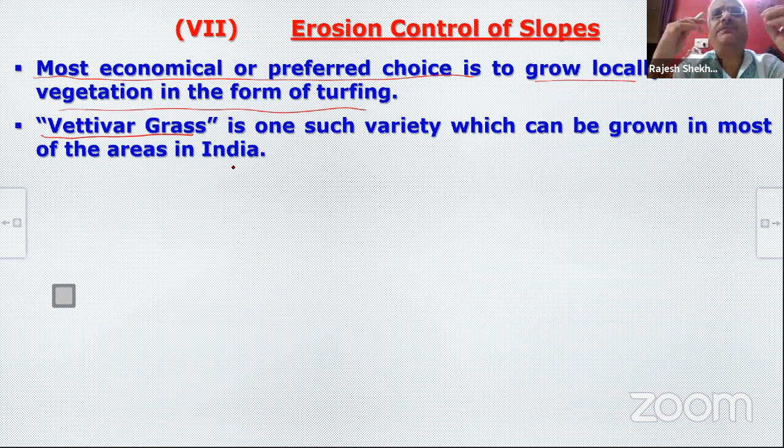It has got different names in different regions. In our standards, we have published a list of names - in Gujarati, Marathi, Telugu, Tamil, Punjabi, Rajasthani, UP, Bihar, Bengal - it is called by different names, but it is one such grass, recommended by ICAR, the Indian Council of Agricultural Research.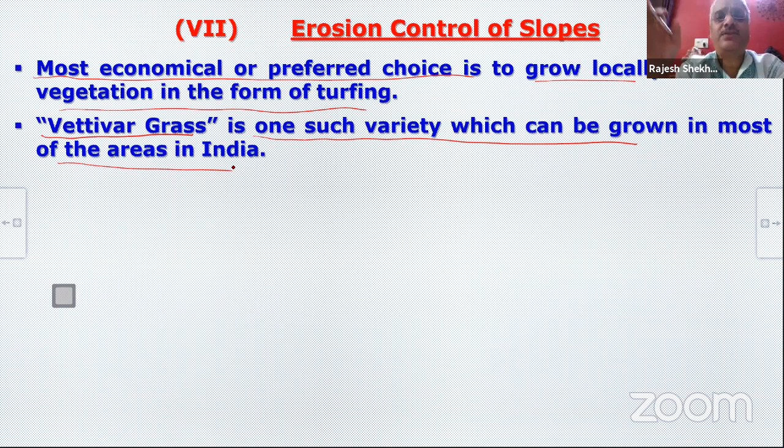We say it grows in most conditions, so if a locally available plant is not growing, then we try vetiver. This vetiver can grow very high, as you can see compared to a human being. It is planted in the form of hedges, leaving some space in between, and after some time it will cover the area.

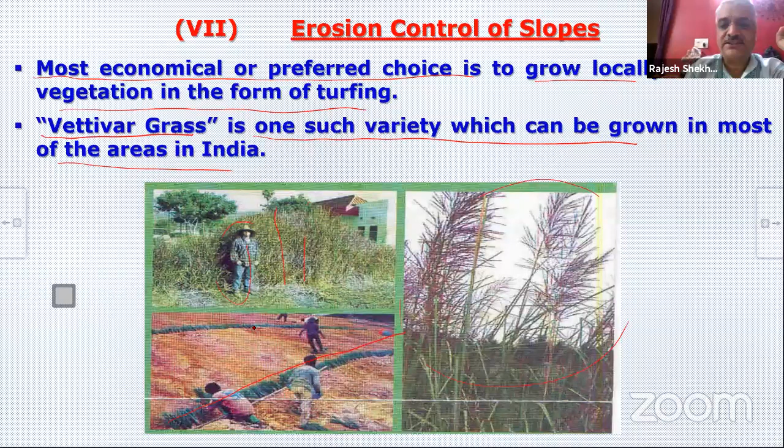If that also does not succeed, due to either the type of soil or scanty or excessive rainfall, then we have to go for external measures using geosynthetics to aid the growth of vegetation. It absorbs moisture for a longer time, and may give extra nutrients too. On this slope, you put a geosynthetic layer, and then try to grow vegetation in it. Geosynthetics, in the order of cost and preference, are used like this.

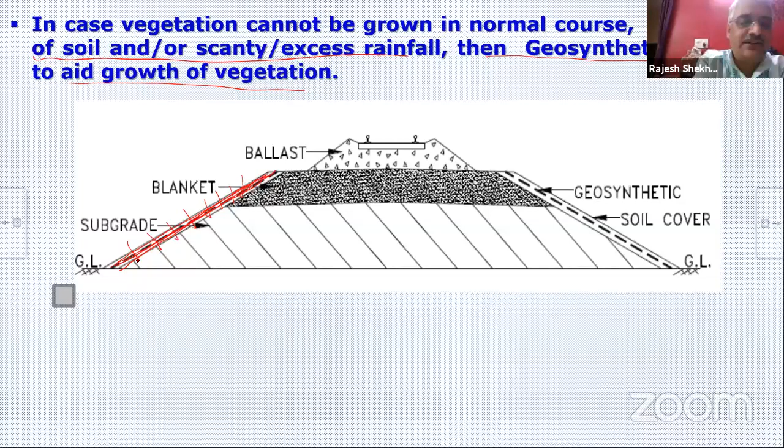Generally we must use jute geotextile or coir because they are very cheap, local, Indian-made materials. We have already issued specification for jute geotextile. For coir, the National Coir Board and RDSO are in talks, but so far that has not happened. Jute people have done a lot more research than coir - I'm not saying coir hasn't been researched, but jute geotextile is a very well developed thing, and they are made from natural material. Quite often this problem will be solved with these.

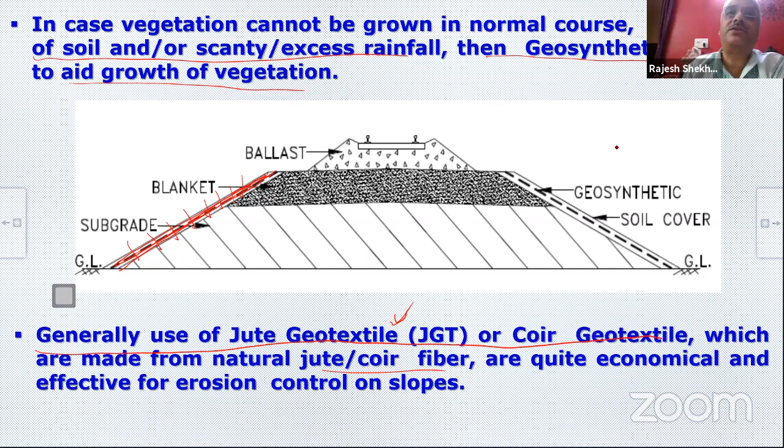Even then, if it is not solved, further in order of priority we can use geomats. We lay the geomat, nail it, and then put some soil cover on it. In this soil we can put some nutrients, a good type of soil where vegetation can grow. There are also reinforced geomats where boulders are present on the bank, which also ensure it does not get torn apart in tension.

Then if geomat is also not working, we can use geocell mattress, because with geomat the thickness is only 1 to 2 inches of extra soil, whereas with geocell you can go 4 to 8 inches of extra thickness. So you put the geocell, anchor it, and then put good soil and grow vegetation.

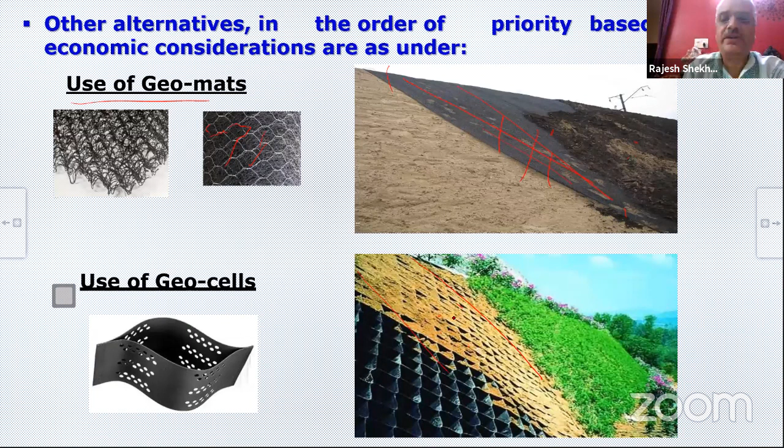And if that is also not succeeding, the final brahmastra is hydroseeding. You can grow grass on any barren land or waste area, but it is very costly. Hydroseeding, as you all know, is a patented product - everything that is its content comes in a bag, you just mix it with water and spray it, and within 10-15 days you can see the shoots.

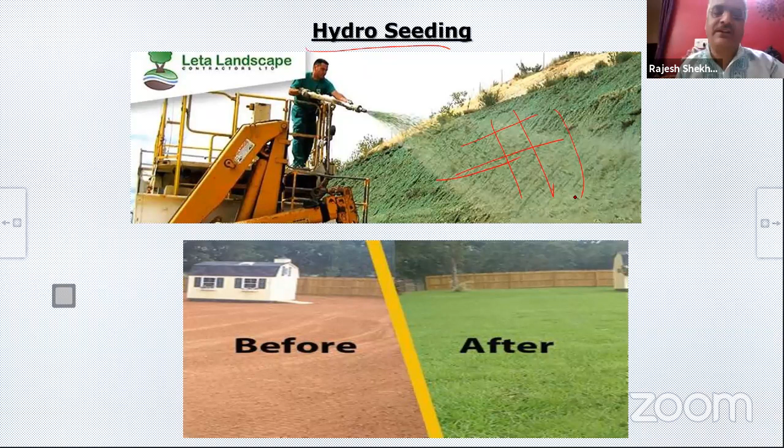In fact, we have tried this in railways at 2-3 places. Recently, I remember we tried it on the new line between Bangalore and Hassan, where it was very barren with boulders everywhere and nothing was growing. Within the 8th or 9th day, green shoots started coming.

So this is slope protection, and the last topic is subsoil. Now, whatever man-made parts we have seen, this is the last slide - the existing soil, whether we should do something there also. Yes, if it is weak, we have to do it. We classify soil as weak based on 3 criteria. These tests are done as part of soil exploration or geotechnical investigation.

If EV2 value of soil is less than 20 megapascal, or undrained shear strength is less than 25 kilopascal, or corrected N value in standard penetration test is less than 5, then the subsoil or existing ground is classified as weak. This is very common, as I told you, in all of our coastal areas, river delta areas, or along the rivers, and some other parts of India where marine clays are the worst problem.

So there, if your soil is weak or soft, ground improvement is to be done. I'm not going into those details - there are various methods of ground improvement. If the layer is shallow, you remove the bad layer and put good soil, or you can use prefabricated vertical drains. You can use stone columns, geosynthetics, encapsulated stone columns - all sorts of things are there. Why is ground improvement required?

If you don't improve the ground, and this existing ground is weak, and I construct an embankment over it and start running trains, this ground will keep getting consolidated for a period of up to 5 to 10 years. We can calculate this - I developed software also for calculating consolidation time. Even for a 10 to 15 meter thick layer, it goes up to 5, 6, 7, 8 years. For that period, this ground will keep settling, the bank will keep settling, and my track will keep getting disturbed, which is not allowed, because the tolerance required at rail level for track is very, very high compared to road.

So we want to reduce the consolidation time and settlement. Before I start my trains, or rather construct the track, all the consolidation should have happened. I want to enhance the consolidation.

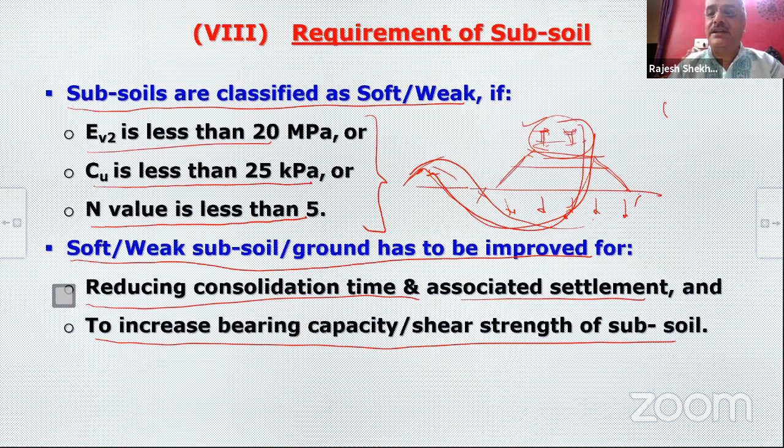Now I will stop the presentation and take your questions - I will check the chat window.

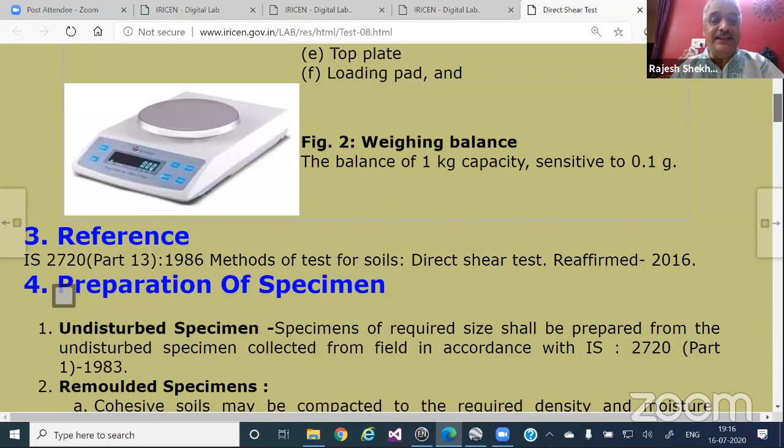If you go to geotechnical engineering, all these lab tests are there, like grain size analysis, wet and all. Any test, let's say I want to see direct shear test. If you go there, the test procedure is there, what apparatus is used is there, the reference is there. On the same thing I've written a book also for our people. Then how to prepare specimen, what is the test procedure, everything, how to do calculations, how to prepare the report. And finally, there's a video on every test, either taken from YouTube or prepared ourselves, so you can see the whole test procedure on video.

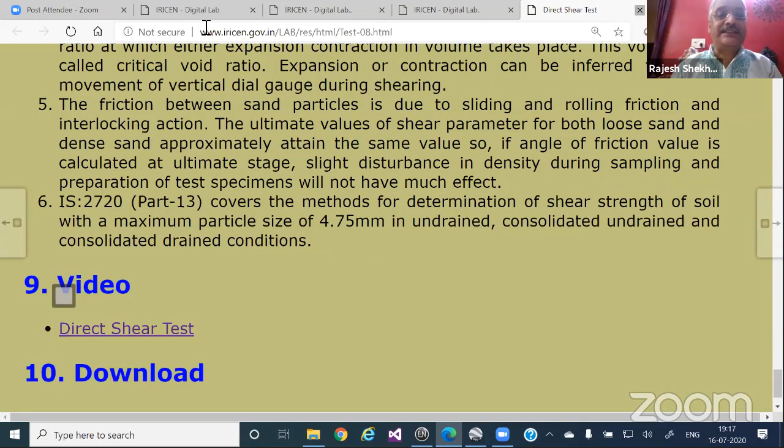In fact, visitors coming to our lab, we have made a virtual lab. There are smart TV screens in front of machines, you can see there, you can conduct the test yourself, no instructor required. You can download this procedure also here, only thing is video cannot be downloaded. So this is the next thing, digital lab, anybody can make use of it.

Then we have made a lot of software, of course there are railway applications, but some of them, like I made a software recently, very simple in Excel, ground improvement version 4. There's a paper where it says how this software is made. It's an interactive software, not like a black box software, it's an Excel sheet. You can keep on writing your project's data, and this is how we teach our trainees; you can learn it and at the same time solve it also. In fact, I am making a software, almost ready, for RE wall design, internal stability one, under beta testing. That also will load here, so you can use these features also. Then this is the other teaching and presentation material.

Every day we have got 8 courses, so every day 8 into 6, 48 hours of lectures we give on various topics. All our presentations and teaching material, our PPTs, everything - a wealth of information. Anybody who has patience can go through this.

Below this, I'm going to put in next week's material, because now Pune is under lockdown for 10 days. In our digital model room, various components of track, rail, sleeper - anything - their photos and videos will be there. These facilities, every month we are adding something, some animation or something.

Another beautiful piece is this e-learning. I will just show you. In e-learning, recorded like NPTEL, we are trying to develop an NPTEL of railways equivalent to that - track machine, bridge and works. Here in works you will have my lectures - soil classification, geotechnical investigation, slope stability analysis, pile foundation. Today evening I'm going to add yard drainage.

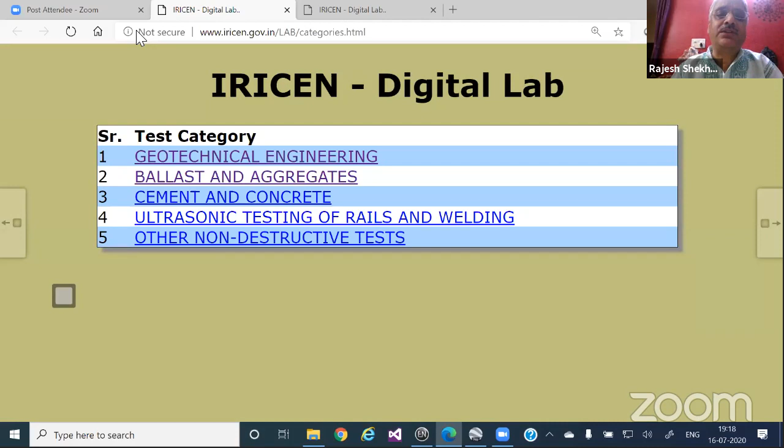So a lot of information is available. It is free, we don't charge. Previously only members were allowed, now it is free for anybody. Kindly make use of this website. That's all I wanted to say in the end. I will stop sharing the screen.

Next question: what are the ground improvement methods in expansive clay for high speed? If your bad soil layer is up to 3 meters, world over there is a practice - I did a project in Malaysia where soil was 10 times worse than this, for 160 kmph on meter gauge, the highest speed in the world on meter gauge today, and the best type of ground improvement was done. So world over, practice is up to 2 to 3 meters.

If your soil is bad, then you do either full or partial replacement of that soil with a good granular, non-cohesive soil. If the depth is more than that, you have to do deep penetration improvement, most commonly PVD. But in some cases the soil is so bad that even after PVD, even after consolidation and pore water pressure dissipation, you don't get the required threshold strength. In case of railway embankment, we talk about strength under dynamic load condition, and there we have to go for stone columns.

Nowadays there are geosynthetic encapsulated stone columns also, where lateral displacement is very high and ordinary stone columns don't work so well. There is no Indian code, there is an EBGEO German code. Keller has done a lot of design work - on their website you can find a lot of material.